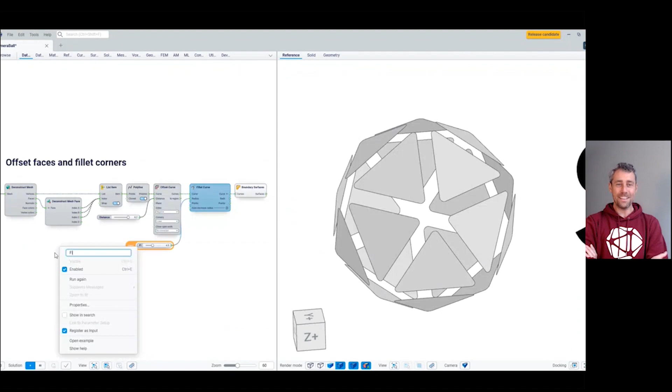First, we used our software to rethink the icosphere, the icosahedron, as Giacomo told me it's originally named, a mathematical expression. We really figured out the best shape with a parametric optimization to fit this new era and the style of this new world, the Synera world. So from a design perspective, we tried to keep the best of ELISE and convert it into the new era.

But what actually is behind Synera? What does Synera mean for us? Synera consists of basically two ideas. The first idea is syn. Syn comes from the Greek language, and it stands for with, together, connected, like synergy, synapses, or synthesis. You always use it when you bring things together.

And this is actually what we're doing with our software. We are connecting software tools, we are connecting engineers, whole departments. We are breaking up silos. We want engineers to do nothing twice anymore. So we want to have these synergies in the work, having efficiency all over. This is at the deep heart of our connected engineering environment, that we want to use synergies.

The second half of the word is era. And of course, an era is something completely new in product development, a whole new era of how to do things, how to develop products. That's why we, as a company, as pioneers of this new era of a low-code environment in the engineering domain, want to position ourselves as the first era where engineers work together in a connected engineering environment. And that's what Synera stands for.

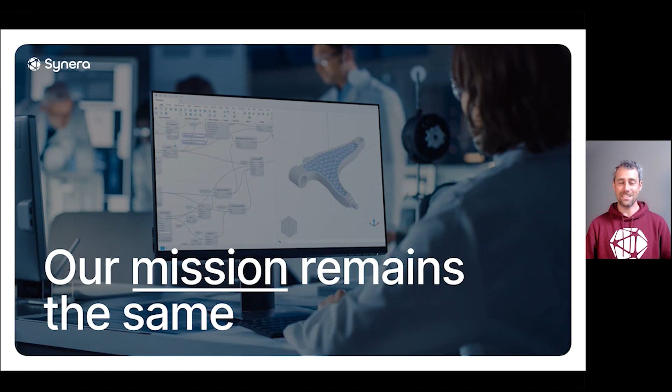Well, super exciting, thank you, Moritz. So we're now Synera. So you know what? The first thing we have to do now, Daniel, Marvin, we have to change our backgrounds. These are outdated now, of course. Let's do it.

So really some huge announcements today. And now our backgrounds are up to date as well. We're super excited to be Synera now and to have a new era start with all of you participating today. Daniel, we have a lot of other things to show. I'll hand back over to you to take our audience through all the exciting things that are new.

Thank you, Mael. As you heard, we have some great updates today. We started with our new brand, and today we also have our new version, the Synera 2022-10 Fabulous Freya. We have so many updates for you, so let's have a quick look. We will talk about 4 major upgrades in more detail. Let's jump into the first one.

As you can expect, with a new brand, we also have to make a facelift of our design. So let's load Synera.

While Synera is loading, let's talk about what you have to do to migrate to the new world of connected engineering with Synera when you are coming from ELISE. To be honest, it's pretty easy because migration is as easy as opening a file. The first time you open the new Synera version, you get a nice wizard with 4 steps and some explanation, and afterwards everything is set up automatically for you. Then when you open a new file, you can read all the existing ELISE files you had created in the past, and when you save it again, you get the new Synera file format and all the new functionalities we will present today.

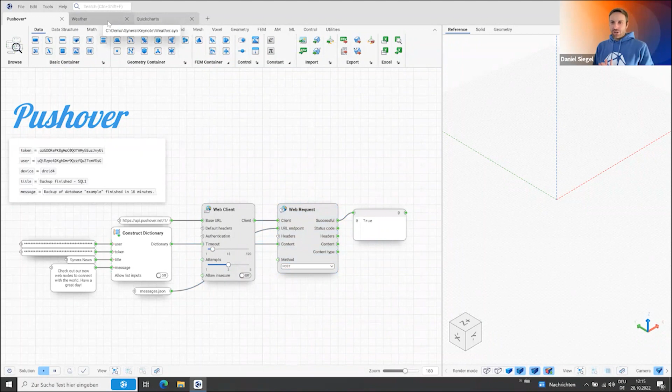For example, in this weather application, it's just an example, but it gives you a feeling how everything works together. First of all, we have to get our URL constructed. We have our base URL here, and we already created some dictionaries on the other hand, so we put them together.

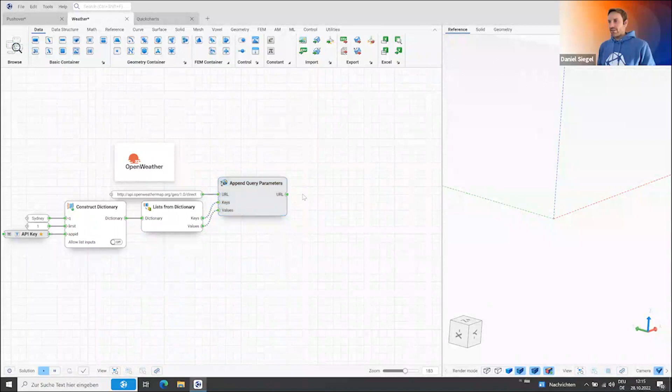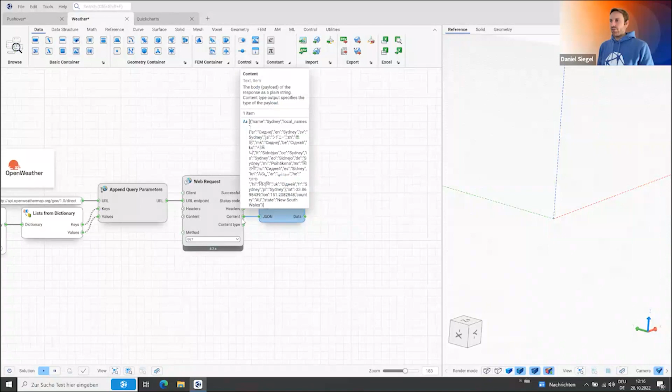Next, we have to make a web request with a get method, and now we are getting data back from the service. Okay, here we go, so it's a busy web service. We have a JSON string here as content, and now with the cool JSON components we can easily post-process them.

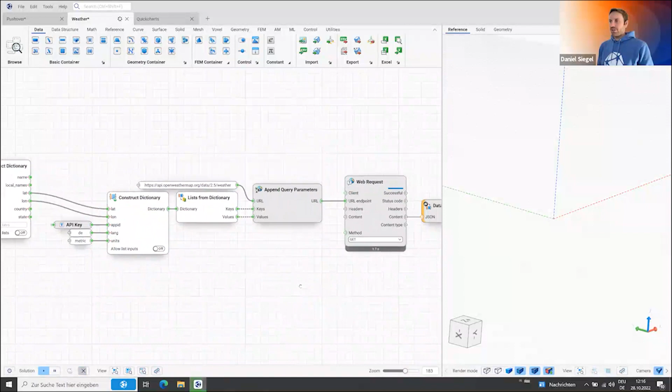So we deconstruct them, we get all the information. The first thing was we ask, okay, where is Sydney located? And we get the longitude and latitude information here. So we take this, I already prepared some other nodes, then we're doing another web request to get the temperature information, and at the end we have another JSON. We just need to deconstruct it when the data is there.

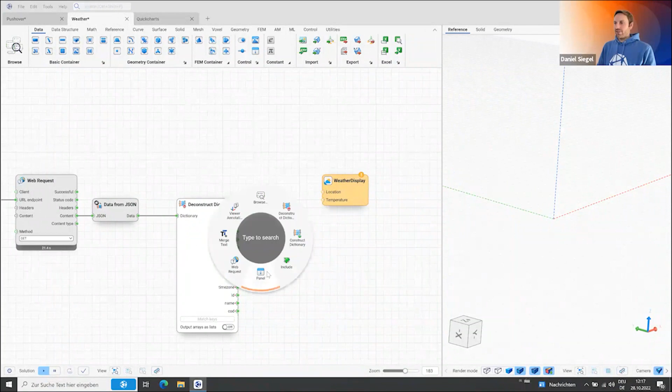It seems that a lot of people would like to get a weather forecast. Normally in my first dry run it was just 1 second to get the data, but yeah, we will see. And here we go, we can deconstruct it, and now we can easily check, okay, here's another JSON where we get the temperature.

And when we put the temperature in, and we put the location from this string into our weather forecast, now we see Sydney has, I would say, calm temperatures here. Let's see where our headquarters is located in Bremen, and what the weather forecast is there.

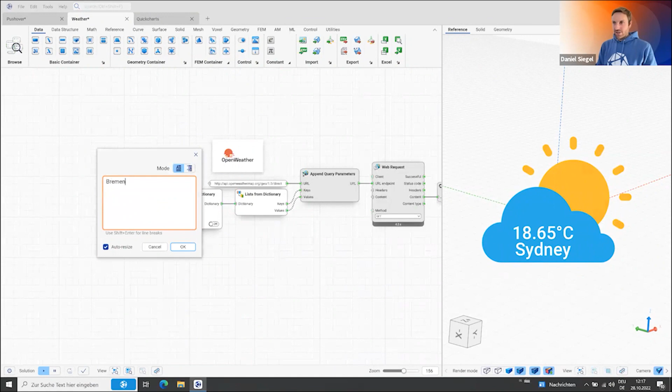Not too bad, even warmer than Sydney. So everything is thanks to climate change, right?

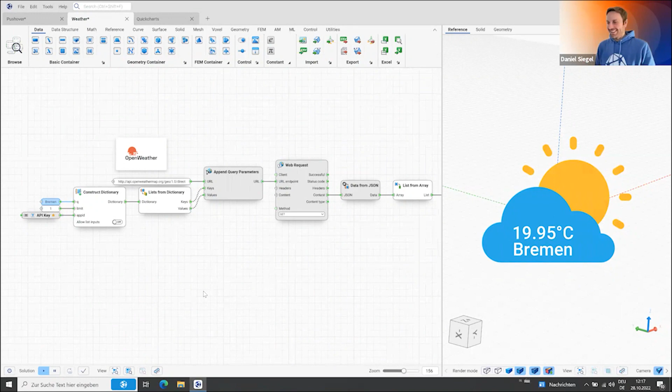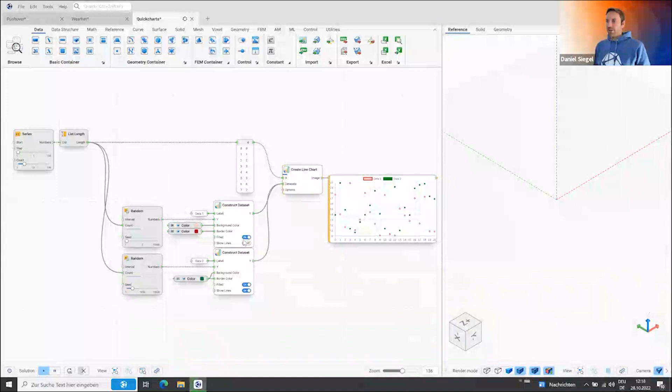Okay, last demo for today regarding the web node from my side. I already showed you the QuickCharts integration, but I wanted to show you how this looks in real. I already created everything and wrapped it nicely up in nested workflows. Now, for example, I can change the data points, and how it's represented. For example, this is a scatter plot, or I can say I want a line plot here with some fillings, so there are a lot of possibilities now available through this new web integration.

You can also have other charts, like this spider web chart. Again, everything is possible, you can have a look into it. I use a bunch of dictionary and web request components, and at the end you get this nice diagram with its new image panel.

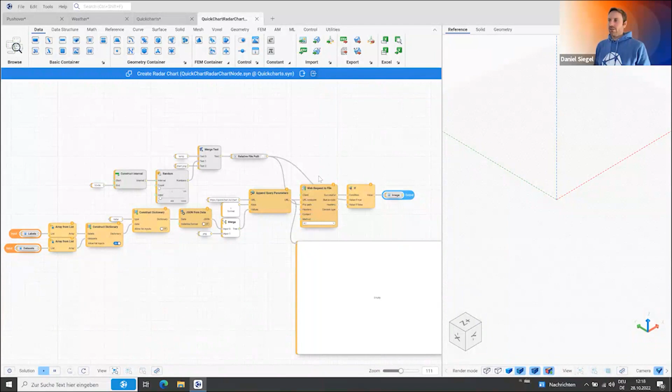Okay, so this was my demo for the web node. I hope you are also as excited as I was when I first got hands on it. I'm really excited to see what you guys will develop with this new integration.

Luckily, we already had two early adopters who played around with it, and one of them is the CEO of Optimate, Jonas. They developed a really, really cool web service for sheet metal bending. But I think it's best if Jonas tells you more about it and how everything works, and how they integrate it into Synera. Jonas, the stage is yours.

Thanks, Daniel, for the introduction, and welcome everybody. I'm Jonas, Managing Director and founder of Optimate. We are a startup located in Stuttgart, dealing with software solutions for the sheet metal industry. Our goal is basically to enable every designer worldwide to get access to sheet metal know-how within seconds.

So everything is about analysis of sheet metal components and optimization. The goal is to get the best out of each file. And I'm really excited to get the chance to show the Optimate demonstration for the Synera use case in a quick live demonstration right now. So let's jump into the demo and see how it goes.

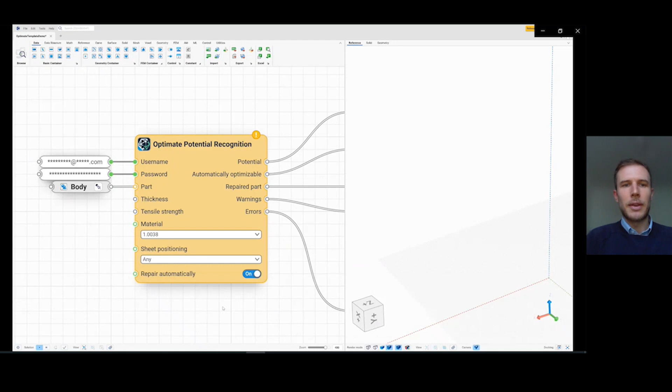So here we go. The Optimate potential recognition node is where we start, and we've set up everything, so it's quite easy to do on your own. First, you select the material and upload or connect a file. In this case, we have a simple sheet metal file on the right side, with 4 inner contours and 1 bend. It's quite easy, and if we connect the part to the Optimate node, we get 2 results basically.

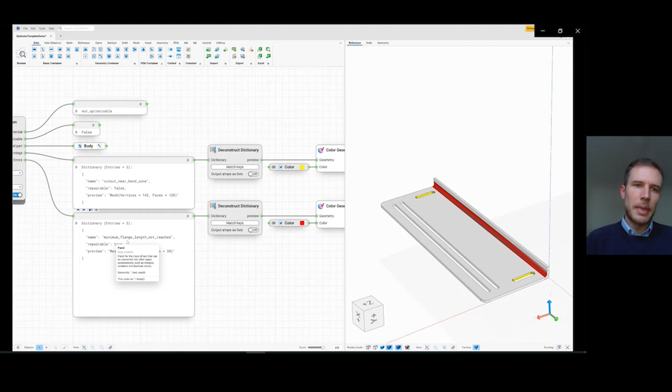In this case, we have 2 issues in the file, so it's not even producible right now. What we got is first that the inner contours are too close to the bend zone, and second, the minimum flange length is not reached. If we click into the results on the body, we see that we've already provided a repaired solution of the file with extended flange lengths.

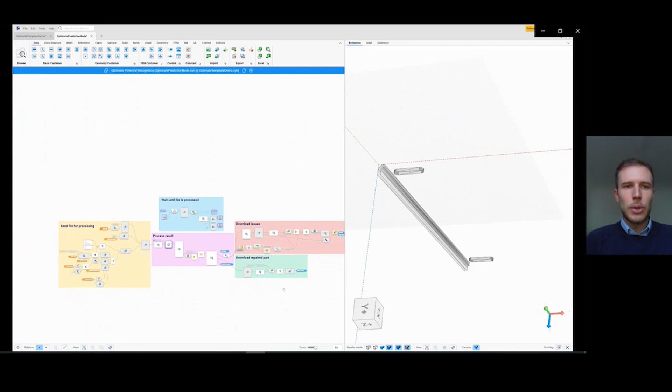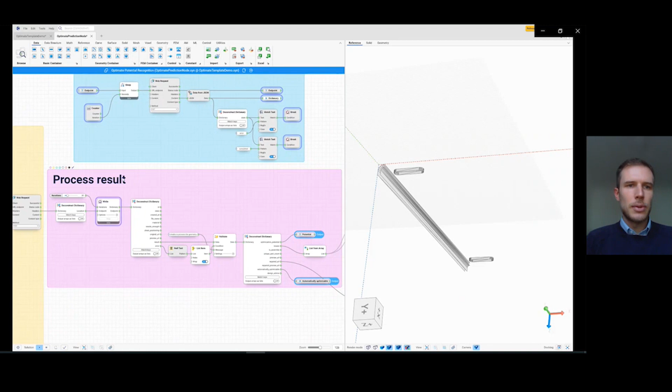So let's jump into the Optimate node and see how it is built up. We see we have multiple areas here. First of all, we sent the file for processing, and it was quite easy to integrate the API into the web services of Synera. After we've processed the file, we get different results, as we've just seen in this use case. So process, result, and the node on top is waiting for the results.

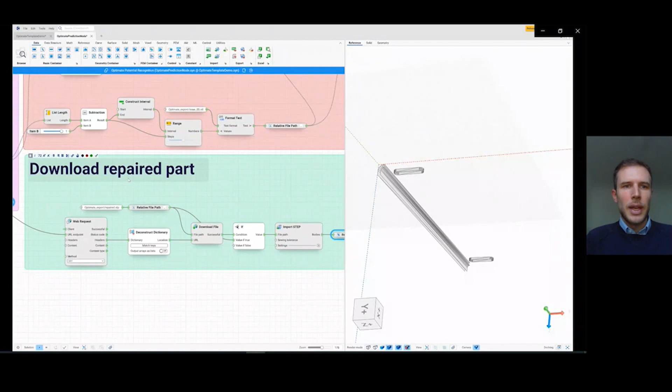Then we have, of course, the downloaded issue. In this case, we had the minimum flange length not reached and cutout diameters too close to the bend zone. We also have the repaired solution available, so you can directly integrate this into your web services and get everything from Optimate available within seconds. It's quite a powerful and easy use case, and now we have the chance to use Optimate right inside Synera.

I think this was just one example of so many use cases, especially for the integration of Optimate. Just feel free to try it out, and I'm really looking forward to your response. So take care and enjoy the meeting.

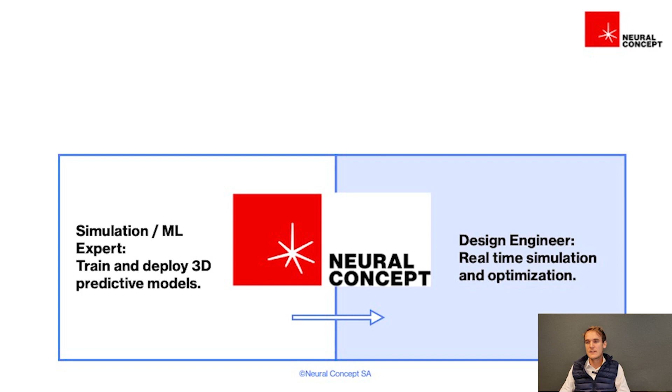We think the Synera platform can be used during these two steps in two different ways. In the first part, the Synera platform with its powerful DOE capabilities can be used to generate engineering and simulation data. This simulation data can then be fed within the Neural Concept platform to train predictive models that are published as applications for the designer experience.

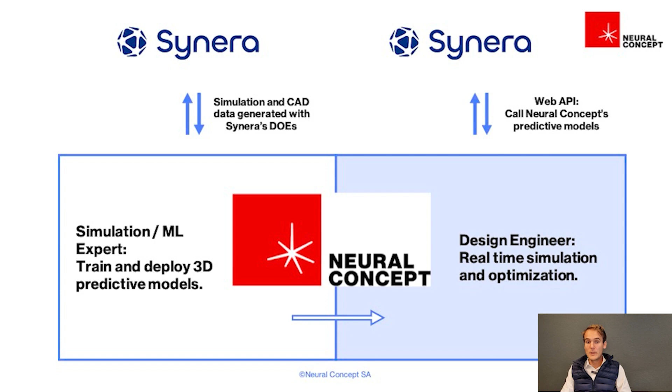These models can then be served as web APIs that can be used within the Synera platform to get real-time predictions or to be embedded within any engineering workflow. So for the release of the new web API feature of Synera, we built this integration, this demo, illustrating mostly the second part of the workflow I was describing.

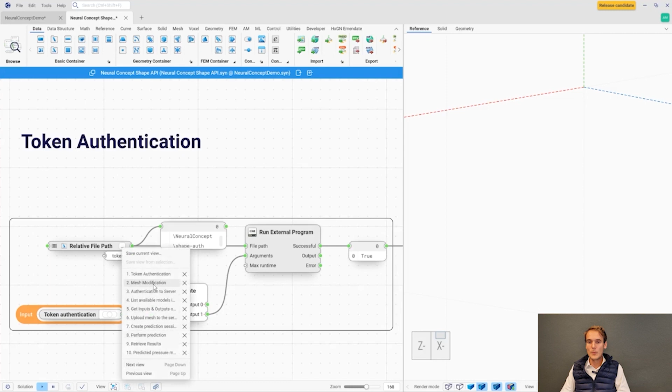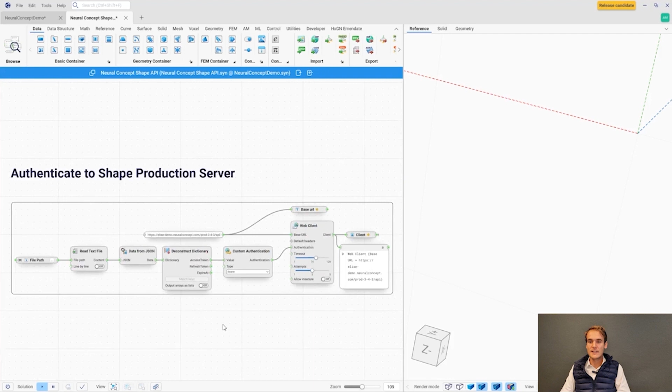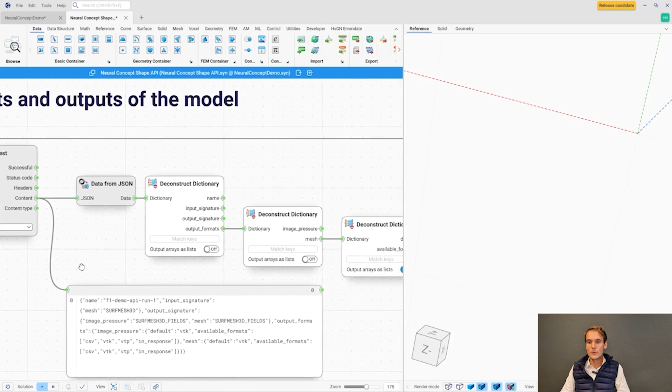As I was saying, this trained model can be made available through a web API that is then called within the Synera platform. This demo is illustrating the few steps required to actually build this integration.

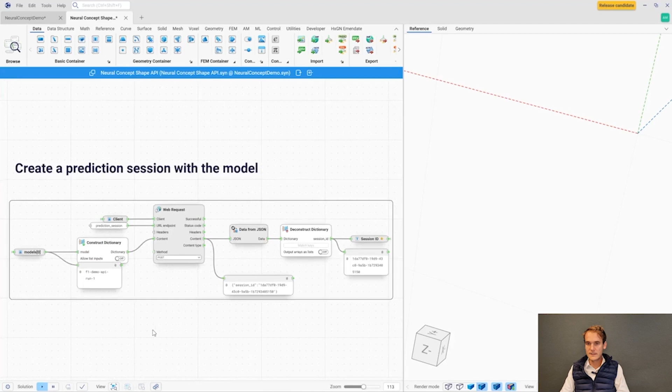In this case, it was actually very simple. The first steps of the integration are more configuration steps regarding the configuration of the API connection. Once this is done, we can create and initiate a prediction session.

That is the step of instantiating this predictive model that is ready to use, and then defining the path of the data that has been generated.

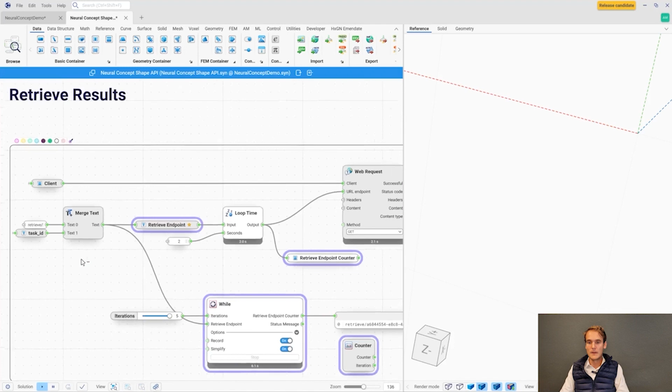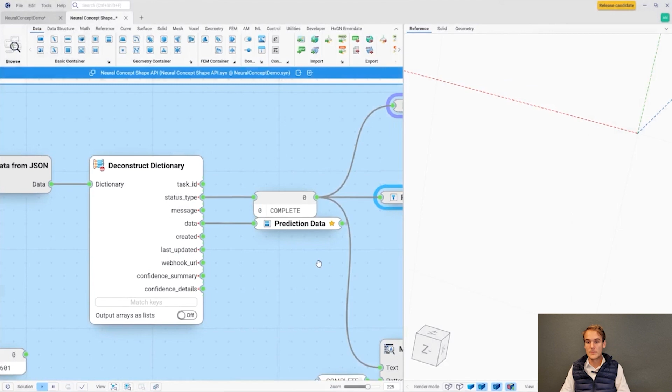In these nine steps that we are seeing here, for instance, we are retrieving the simulation results, which are composed of some pressure quantities on the surface of the airfoil, and some lift and drag quantities.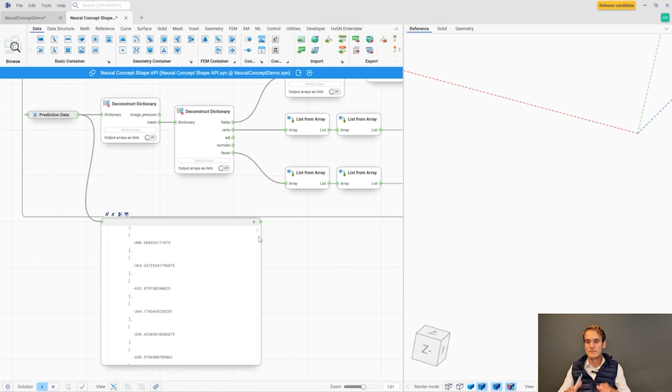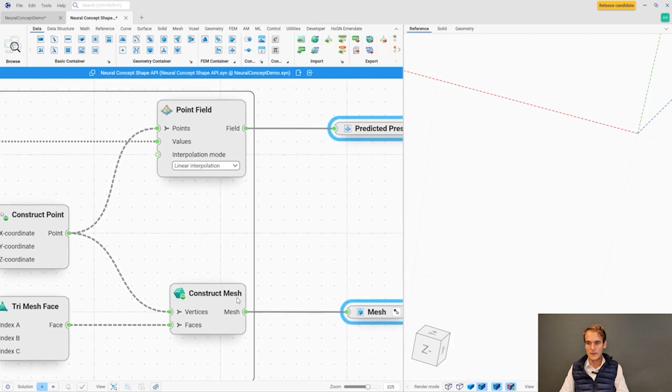In this additional step, we are programming in this visual environment how to map and reuse the pressure predicted by the API, and how to map them onto the surface of the airfoil.

Once this is done, we can use this integrated workflow to do real-time design exploration. Here we have defined a mesh modification factor that creates new airfoil configurations by deformation. This mesh is then fed via the web API to the Neural Concept prediction, which can then be used for real-time prediction.

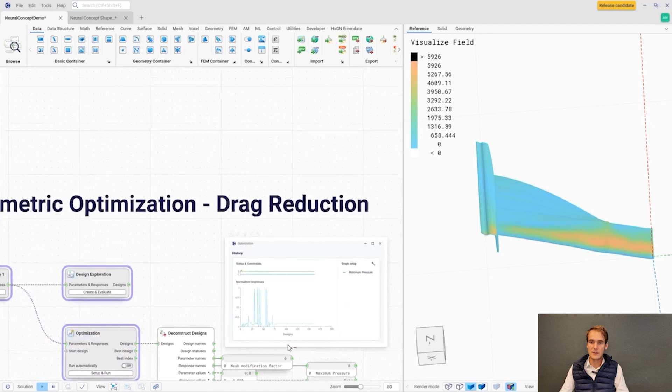And in the second step, that's what we are illustrating here. Within Synera, this can even be used to perform parametric optimization. So here it's a very simple one-dimensional parametric optimization where we are just optimizing this mesh modification factor in order to optimize

The drag quantity of this airfoil. Of course, this is quite a simple example, but this can also be used to integrate and create more complex simulation workflows. So once again, the Synera platform can be used to generate DOE and generate data that can then be used within the Neural Concept platform to be processed and do this very complex 3D machine learning job, which then can be exported and exposed as a web API to be used also within the engineering workflow within the Synera platform.

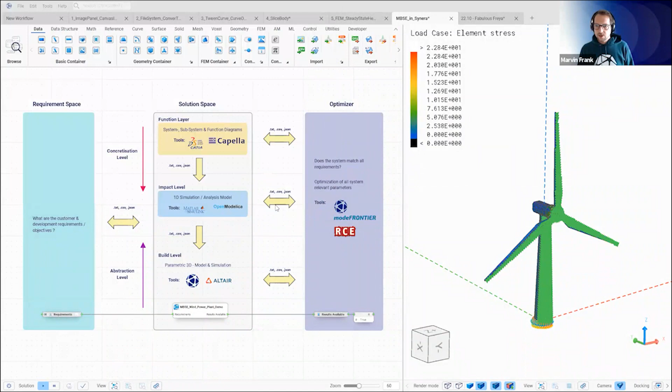You can create the geometry automatically and then run an FE analysis, also using third-party tools, for example Altair. And then later you can make a decision. You can give it to another optimizer. And here, for example, we have a power plant for 7 megawatts, and now we can just choose another JSON set, and the component will run. In the background, we will create the geometry and evaluate it, running a simulation. And super fast, you have your new results and you can make decisions very fast.

So we have seen before the global parameters, how to set them, and the JSON files. Let's go inside this workflow, because everything here is packed into this include function, and then check out how to use these new functions.

Nested workflow, Marvin. No functions anymore, no functions anymore. Yeah, exactly, right. Okay, we have to train ourselves.

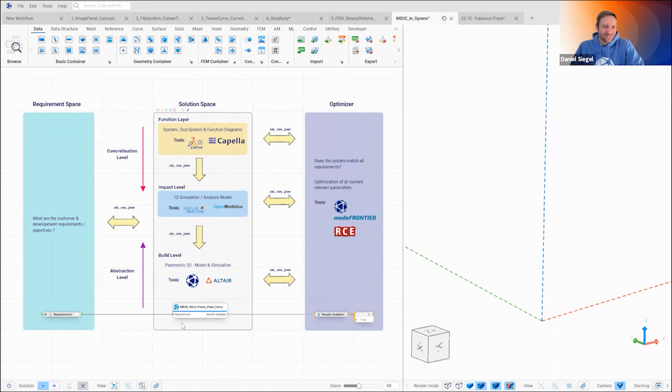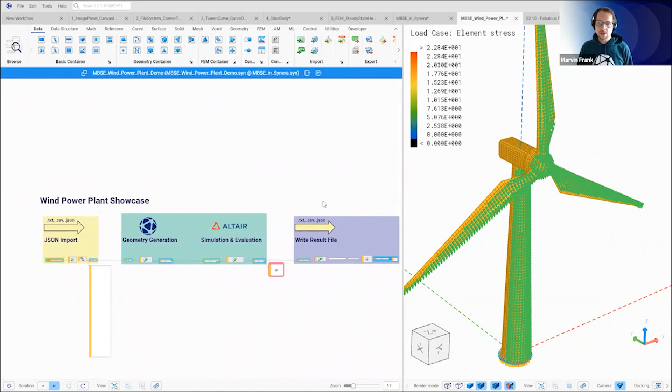So let's go inside this nested workflow. On a high level, first we have the JSON import. We will create the geometry automatically, then evaluate it, and then write out the files again, for example as a JSON, so you can interact with other optimizers.

So if you read it in, first we had the data set of the small turbine, now we have the large one. Here are all the geometrical requirements, or the data needed for the analysis.

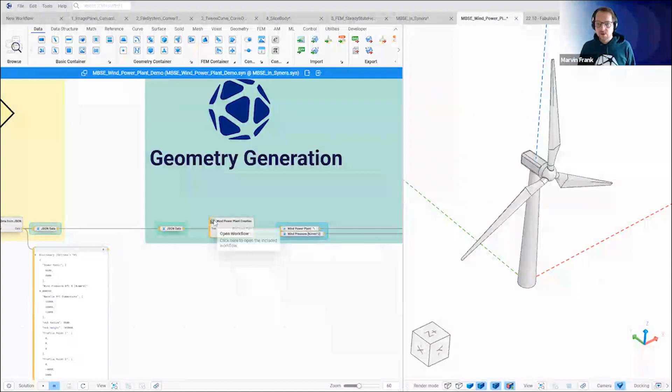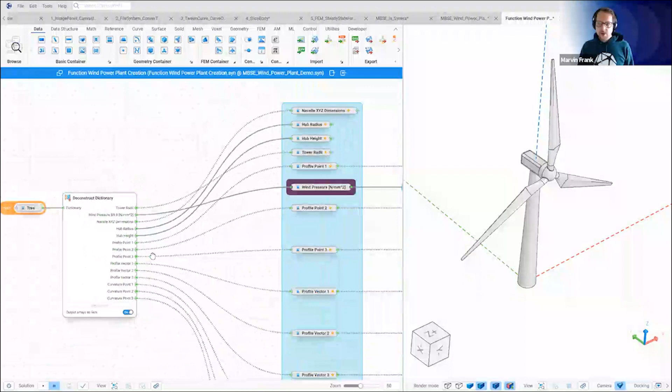Let's see how we process the data. So you have the JSON, you can deconstruct that dictionary, and you have access to all the parameters. What to do with these parameters I told you before, and we've seen that also in the UI/UX improvement session.

Here we have the little star, so you can link that to show and search. Wherever you go in your workflow, for example if you'd like to use the hub height, you can use the radio menu and type in hub, and it will appear, showing with this little star that it's a set parameter.

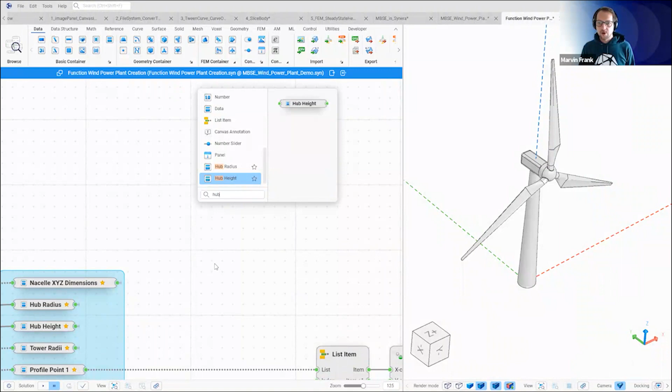So if you have a larger workflow like this, and you need those parameters, you can very easily access them. That's so cool. What to do next?

One of our partners, CSA Aachen, is developing an integration within Cameo Systems Modeler for connecting Synera directly with Cameo. So you saw we have the JSON, it's super nice, and CSA Aachen is developing an integration. If you're more interested in MBSE, or model-based engineering with Synera, please reach out to us.

Cool, what do we have as further improvements? Daniel already gave an introduction into the control web and the web services. We saw a lot of very nice workflows he created himself, sending push notifications, or connecting with other companies, and you can access those web services.

But also in typical fields like geometry, or for example curves, we have very nice features for creating new curves. The tween curves component is super nice. Something new also in data: the image panel is new, which we've seen briefly before.

Then improvements and new nodes in the voxel area, in the AM area. File system, we've also seen that before - that's super important for handling JSON or whenever connecting to file management systems. And the thermal FEM opens up a new field in the FEM environment.

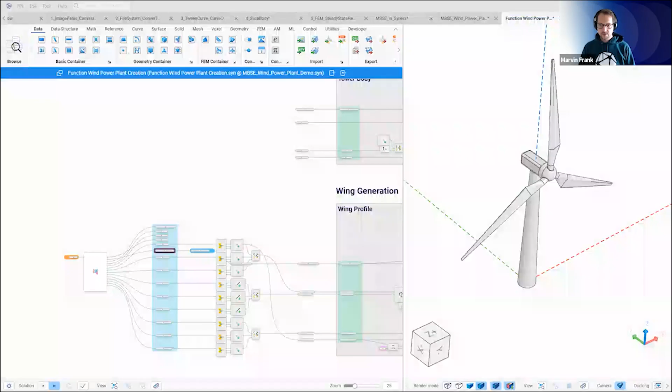but you can also copy the image or save it for your colleague, for example. Then this is cool, the new canvas image. Let's check this out and import a picture. So I have some import data here, Synera pic, and it shows you what you'd like to do. This is a very large image, and it asks you: would you like to scale it down or keep the original? I like to scale it down.

So I save some computational power, because you've seen it before, it's already on the limit. So here's Synera and the Synera pic, and you can give it a frame. You can link it to any URL you'd like. You can lock it, so then you can't do anything with it. But you might know that under edit, there's 'interact with locked objects' - you can go there and unlock it again, for example. And the same, you can copy that image and save it.

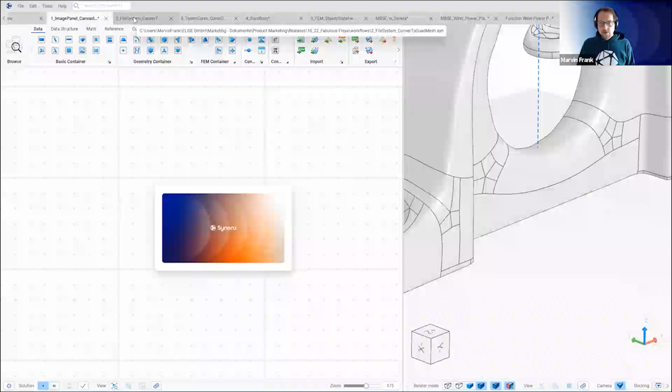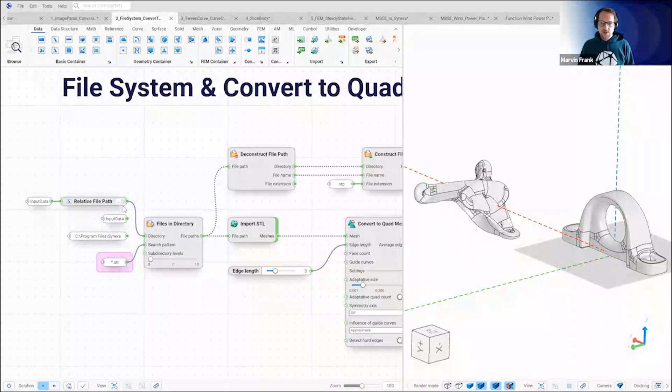Cool, so next thing is the file management system - file system nodes here, and I just made up this small workflow. So here we would like to point to the relative file path. You can do that in different ways, or also choose any other path you'd like. And then we search there for any STL we have. So here in this one we have some STLs inside. We search for it, but also you saw there were some pictures inside in this folder.

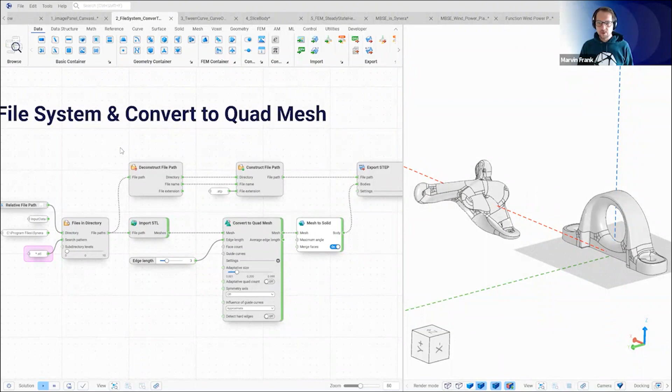So here we only have the file paths from the STLs, and then on one stream we import the STLs, we convert it to a quad mesh and use mesh to solid. Now with this 0.2 version it also works a bit more stable. And here we will deconstruct the file paths and construct them new, giving them just another extension. And then we export the step. Very simple workflow - with these new components, you can do all your file management without using any text components.

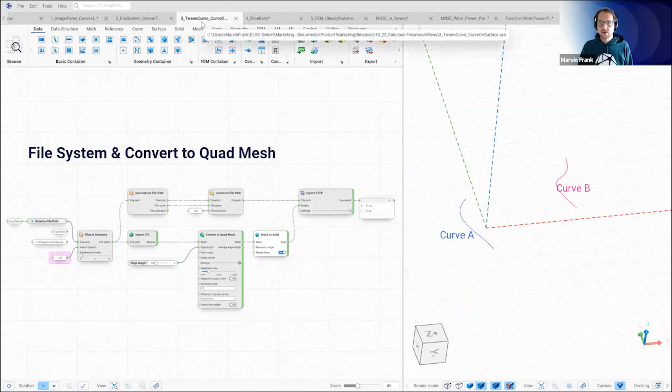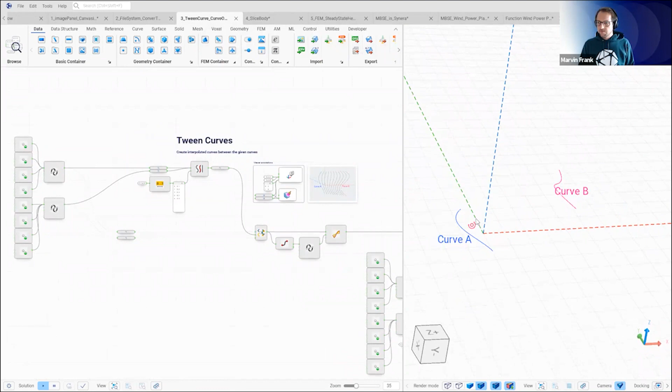Cool, then in the field of geometry, I really like these two nodes. So let's check out tween curves. Sometimes you have the situation where you have two curves and you would like to create a sweep, so you need some curves in between - that's exactly what tween curves does. So it gives you some curves in between, and then you can do the sweep here, for example.

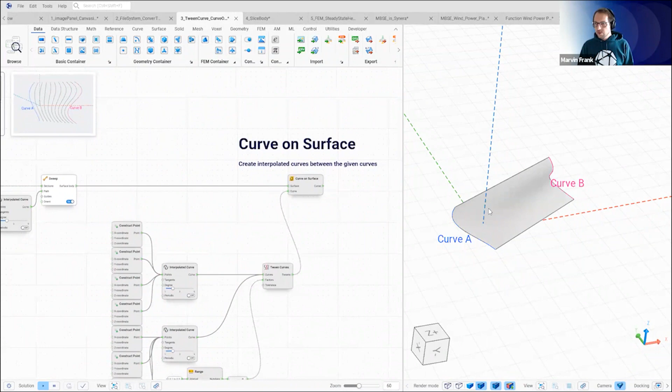And very nice also the curve on surface. So let's use this surface, but let's use some other curves we have here - I also created them with the tween curve. If they are in between 0 and 1, and you have this nice surface, then you can map it onto that surface. Oh, that's pretty cool, like for some design sessions.

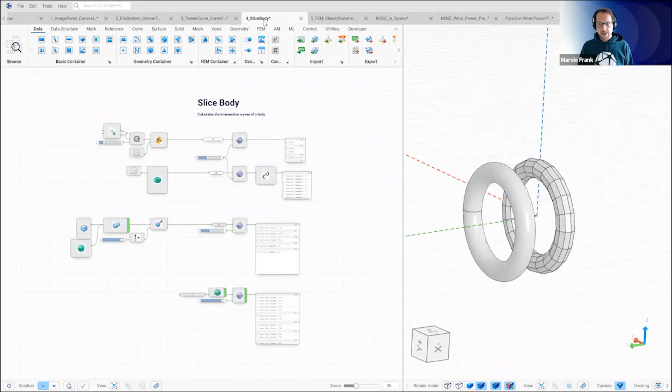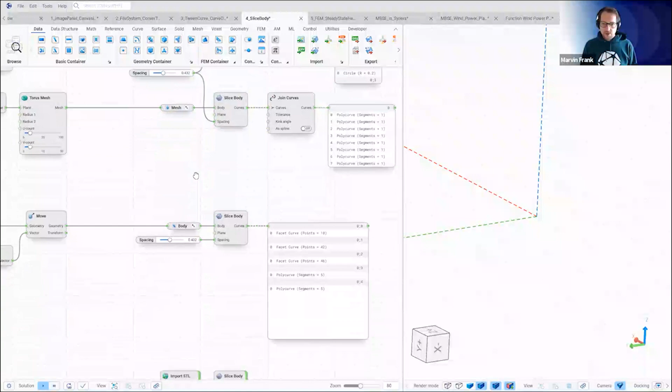All right, field of AM, we have this new slice body node. So here you see a basic example with two toruses, and what it basically does is for AM production, it slices the bodies. It does that for geometries and for meshes, and you know that Synera is also able to do convergent modeling, so here we have both - this was a mesh, this was a body.

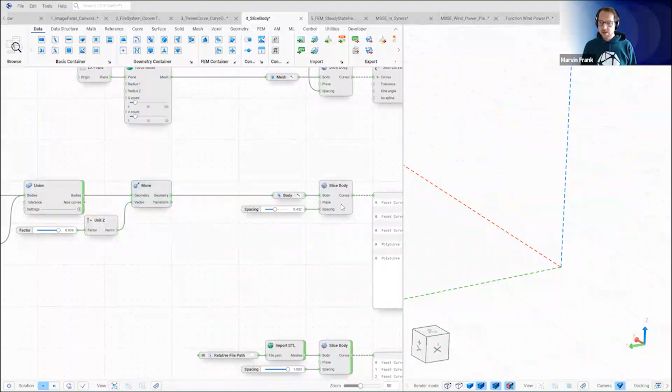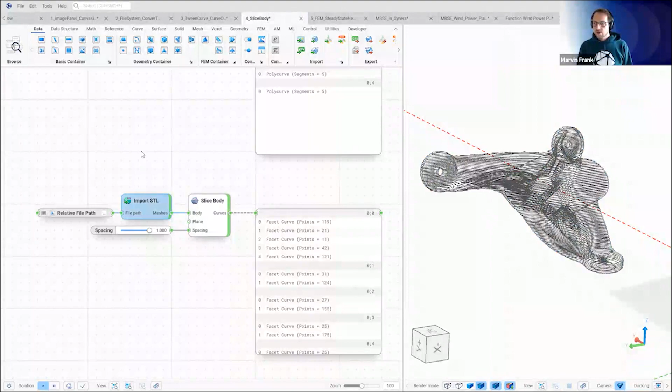Now we have a facet surface, convergent modeling, and that makes no difference also for this part. And then, of course, you would like to see how it looks if you have imported a more complex part. And yeah, here we have the isofix bracket, which you have seen - that works the same. So there's the mesh, and then you can slice it. Now it's a spacing of 1, but you can also set it to 0.1, of course.

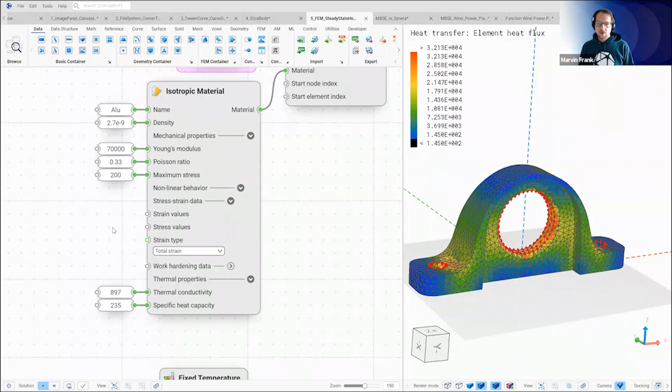All right, our last field I'd like to show you is FEM. We have here this simple bracket. I already showed you the isotropic material component. Here we also have the ability to add in stress and strain data, so you can have nonlinear material behavior. In this example, we added the thermal parameters, the thermal properties of this material.

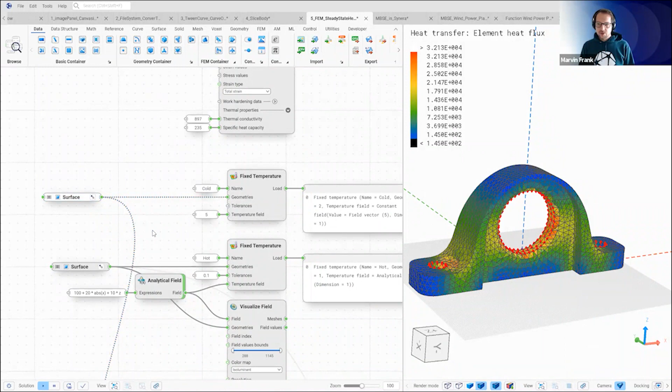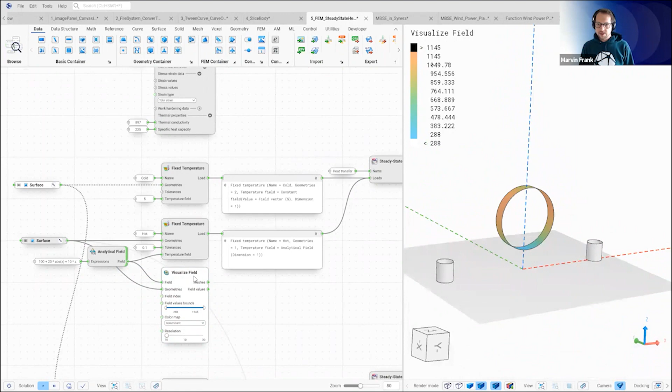And then we have this new fixed temperature component here, a node where we'd like to add some fields, some cold and some hot temperatures. And of course it also works with fields. So in this case it's static, but we also added this thermal field, so we can introduce thermal fields during the simulation.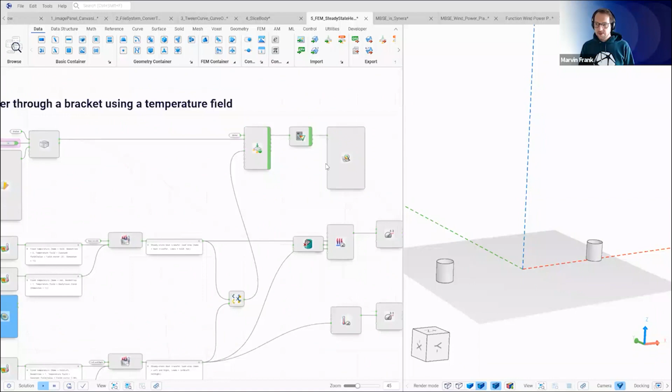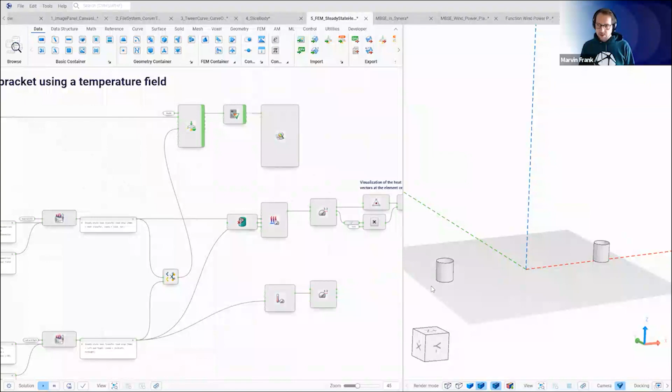Then that is the steady state heat transfer load step, so we've added some more heat here. And here you have your heat transfer and heat flux, which you can also show with vectors. But one thing I'd like to point out is the new fixed displacement component.

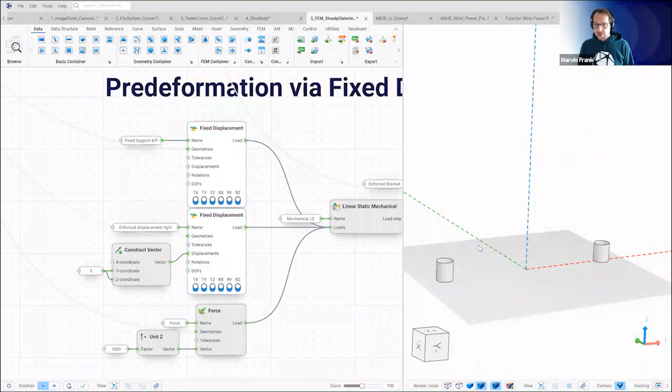Here you see we can have a fixed support on the left side, for example, so we're going to fix that. And on the right side we'll add a pre-deformation. So adding this to the linear static mechanical load step, you'll see that the stresses from this pre-deformation are also taken into account.

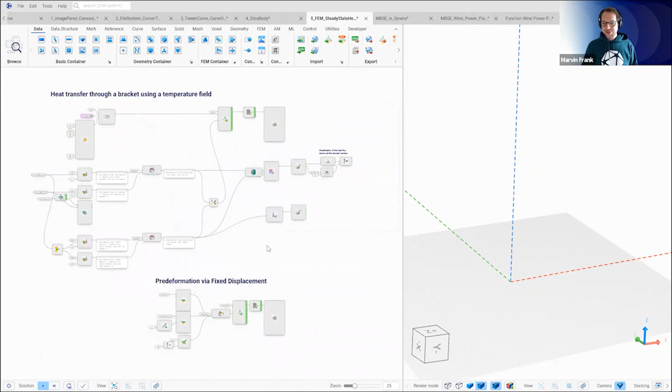So Daniel, would you like to give us a wrap up?